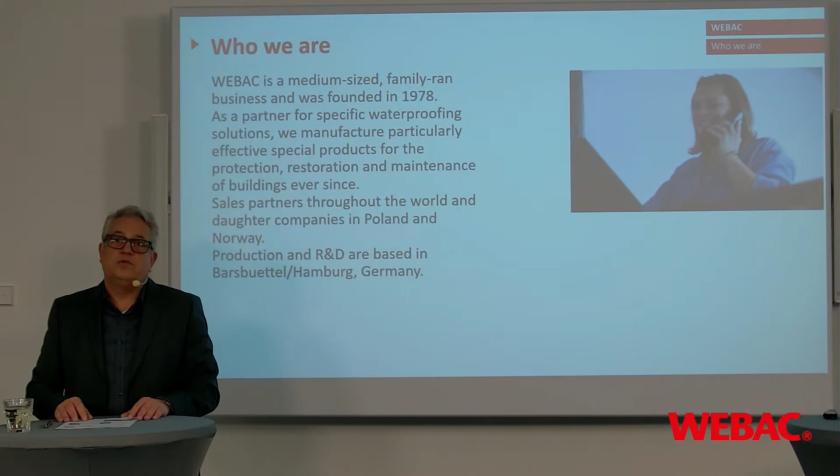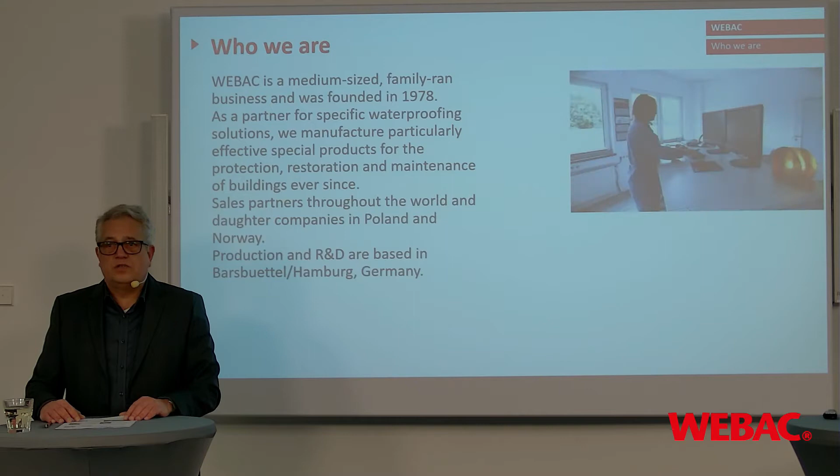So, you already have seen our company presentation. I would like to spend a few words to tell you who we are. WEBAC is a family-owned business. It was founded in 1978 as a producer and developer of construction chemicals for the maintenance and restoration of buildings. We are here in Hamburg with our production and our research and development center. This is centralized here in Hamburg.

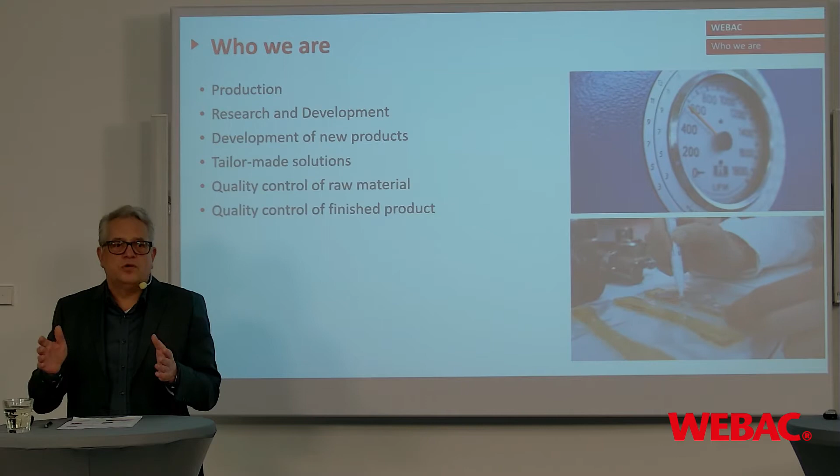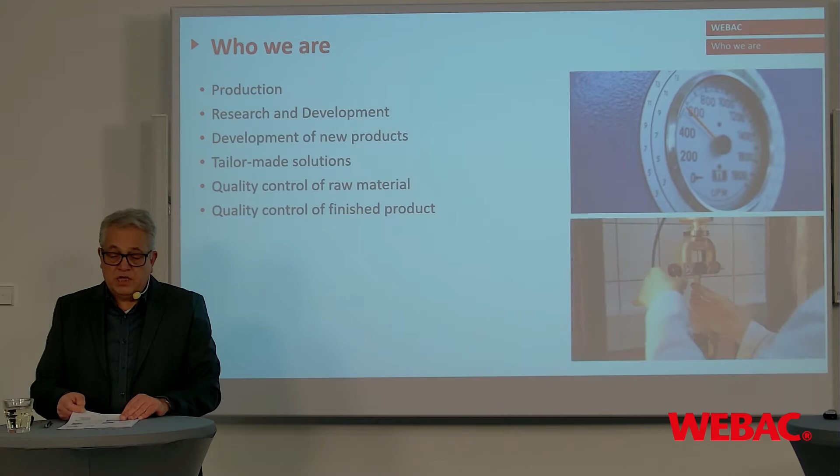This is in regards to quality control, because, and this is one of our strongest points, in the world you find different climate zones, and these construction chemicals react to temperature changes, and it's very important to know which product suits the climate best. Therefore we have short ways into the lab, so we are able to adapt the properties quite fast.

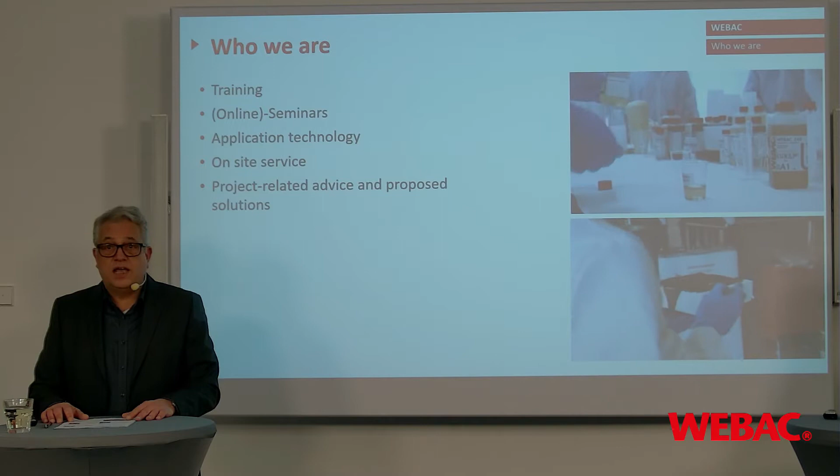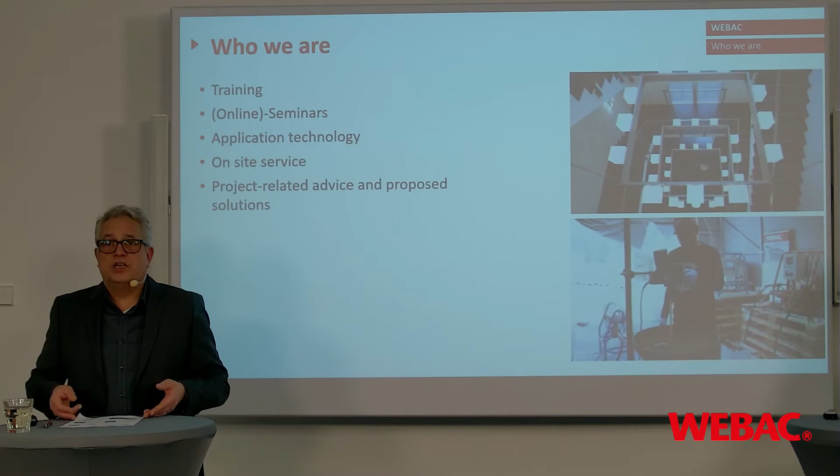We are normally standing here in our seminar room. Like Stefan mentioned before, here we do our trainings. We do trainings for designers, where we focus on the lifetime of the building, but also for applicators, where we focus more on hands-on seminars, how to drill, and exchanging experience. And last but not least, for site managers: how can I control the injection works? Our last seminar today is the Consolidation Line, and I would like to hand over to you, Stefan.

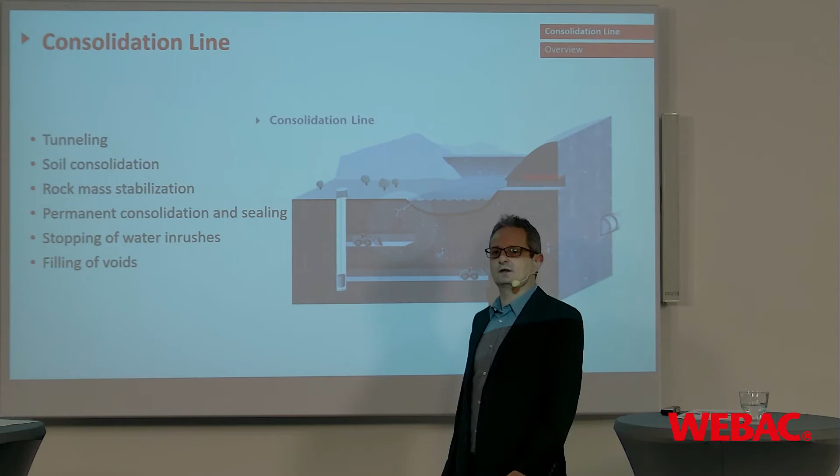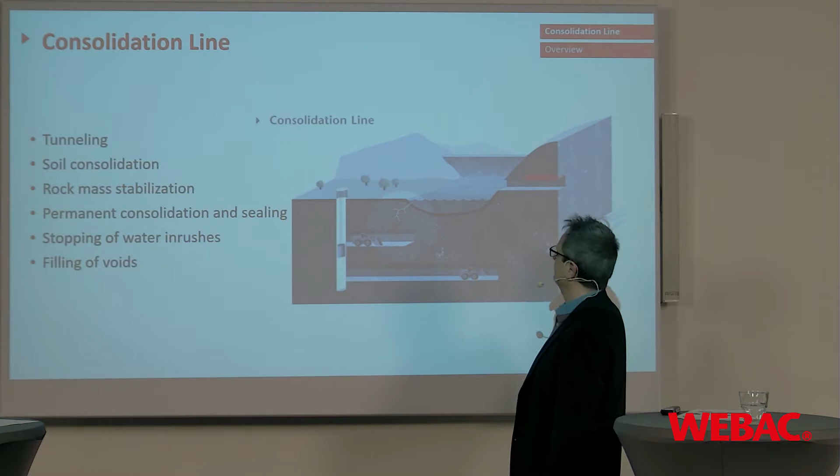Thank you, Markus. Our last seminar today is the Consolidation Line, which means a different application range to standard injection works. Let's switch to that slide. You see we have a whole wide range of these products. It goes from stopping water inrush, and we will see some interesting pictures of that later in small videos, to rock mass stabilization, which is part of bigger things. Permanent consolidation and sealing also includes slab lifting, which has become much more common worldwide in the last year, because the drying out of the grounds causes many problems.

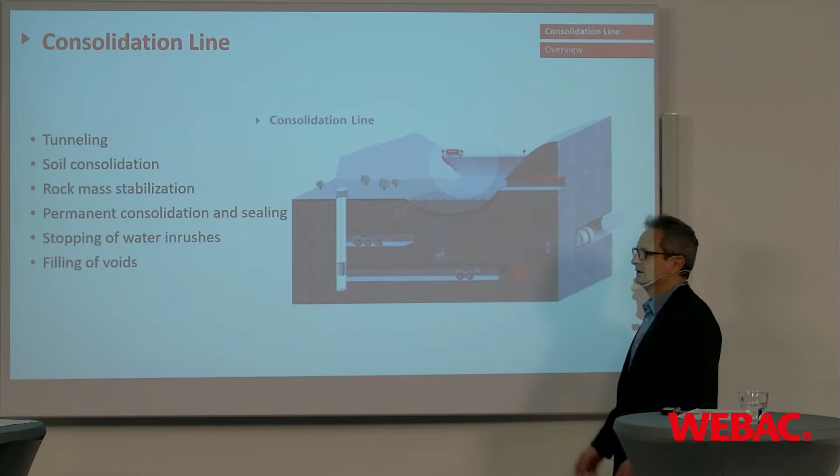As you can see, we have a tunnel boring machine here and a mining area here. It's not only for bigger construction sites; as you will see later, you can scale it down to your small sites, which may be interesting for you to think about these kinds of application ranges.

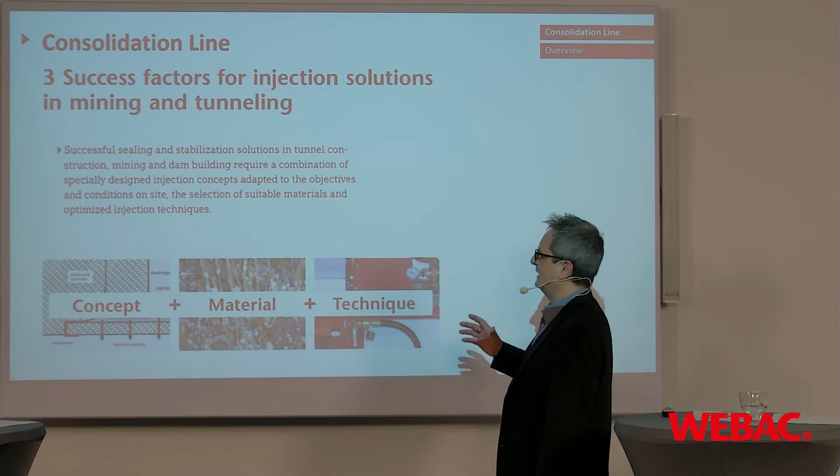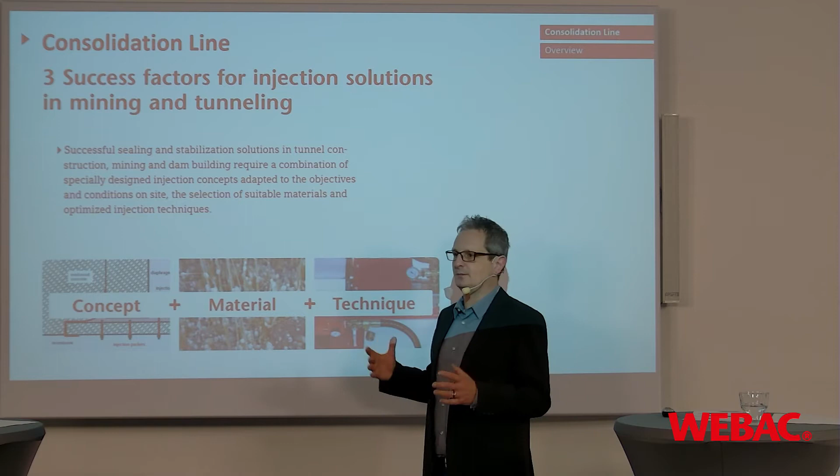The most important thing, whatever products and technique you use, is that it has to be done with three key points to fulfill the right working concept. You have to make a concept: it's necessary to know what targets have to be fulfilled and what the conditions on site are, and this concept has to be adapted to the situation on site, in mines or underground construction sites. It's also key that you don't have only one concept; you should have a second or third one. As we are injecting into an unknown area, you never know what happens, so it's good to have a plan B.

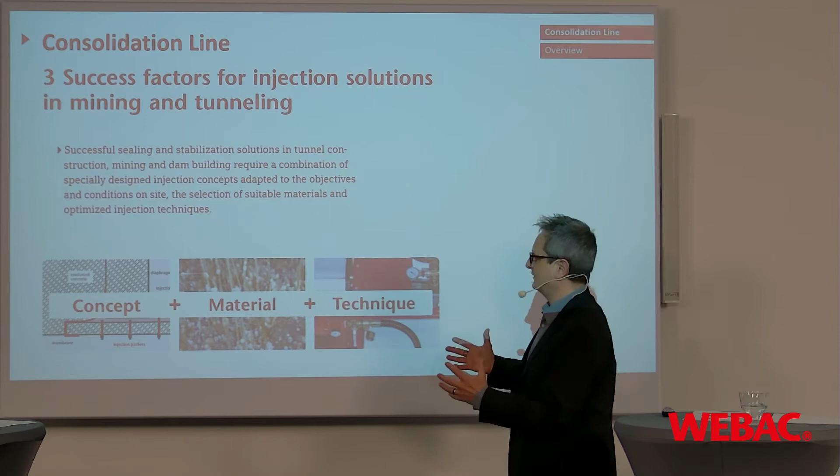Material is the second point. Once you have your concept, you can choose the right materials, because different materials are available depending on the situation. And finally, the technique, which is also important, to bring the material into the construction or the soil: packers, techniques, water on site, air supply on site. These three key points have to be prepared before you start working.

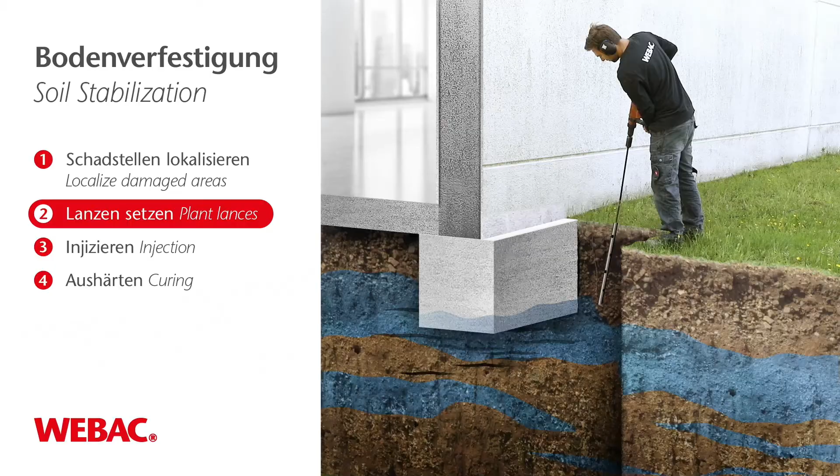Finally, we will show you a small video about how this is working. In this case, it is a smaller building site, and it is about ground stabilization. You see the foundation. The concept is done beforehand, so the target is void filling in underground situations, and therefore we drive some lances into the ground to the depth that we need, which is necessary to know before you do that.

In the next step, you see my colleague there hammering the lances. You can couple lengths of the lances. Then you connect the connector to your pump. Safety is also important on site. You make sure that everything fits and everything is done, and then you start your injection to fill the voids under that construction area.

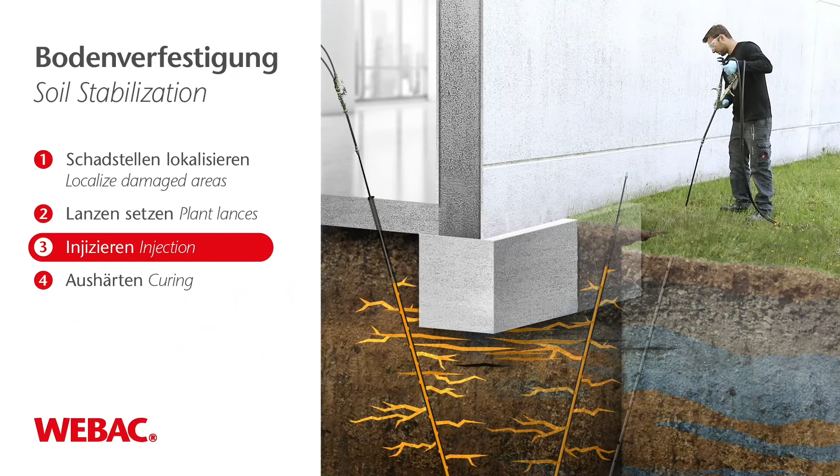This is also important: you do a secondary injection to spread the material in the depths, and after that you can unscrew and recouple everything to check if your work was successful. You see all cavities will be filled in that part. So this is the main process that you see there.

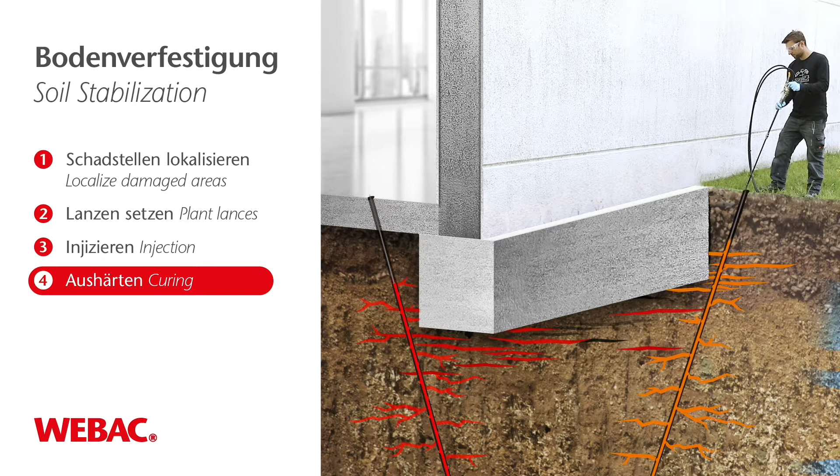So what you saw in the presentation, after the work the foundation is stable again, and here we see how it works in practice. We see it in the pictures, and you saw it in a short video.

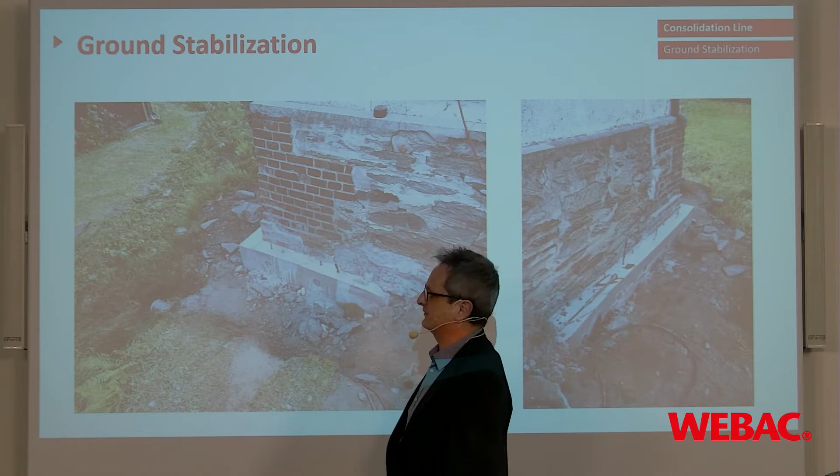So we have the same situation here. We have a settlement of the soil because there's water washing out the soil conditions. So they brought a concrete barrier to make sure we can adjust the lances with a safe grip inside the structure. The lances are placed inside the concrete to stay stable, and you use the injection pressure required for the soil conditions down there. The target, as seen in the video, was to settle and fill the voids under the foundation pit, to make sure there's no collapsing or washing out again.

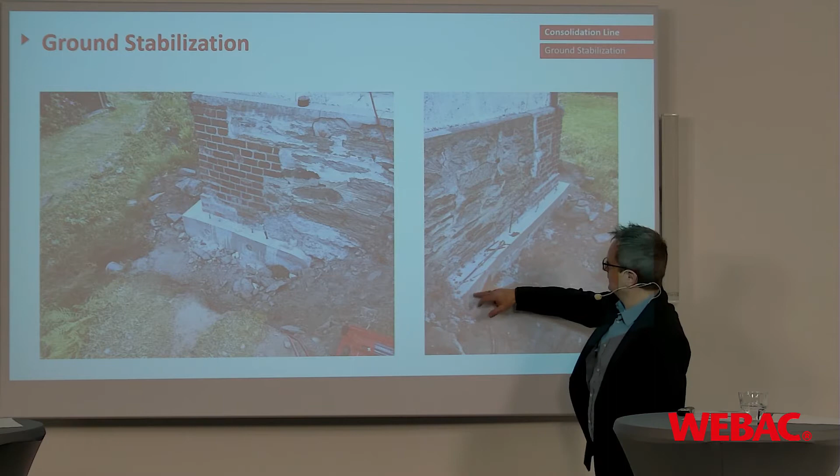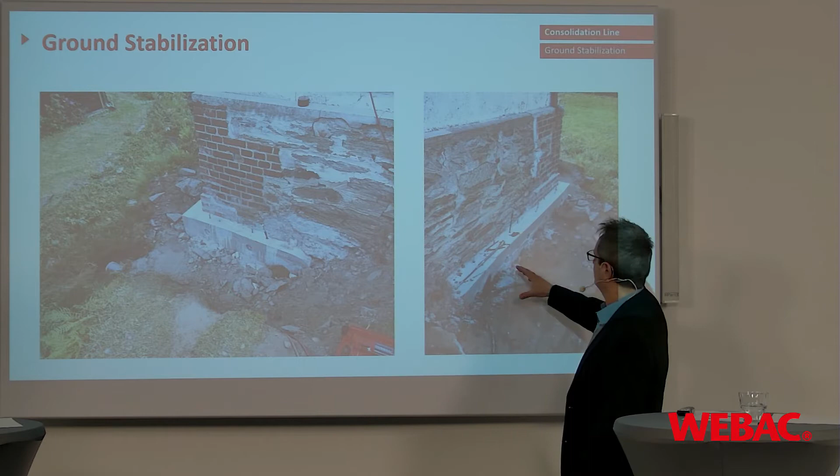In some spots, like this one, it's necessary to get information about the ground conditions. Otherwise, you are not able to place the lances to the depth you need - maybe there are stones or rock under that point, and you're not able to fulfill the cavities or complete the work down there.

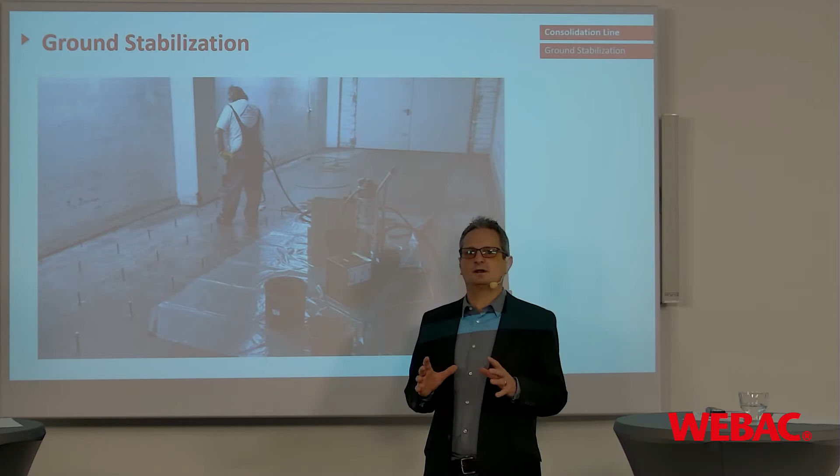Coming back to what I mentioned before, this consolidation line can also be used for smaller spots, which is much more common at the moment, like slab lifting - we get a lot of job sites there. You see the pump is not the big one, it's a smaller pump, handled so you can use it in closer areas.

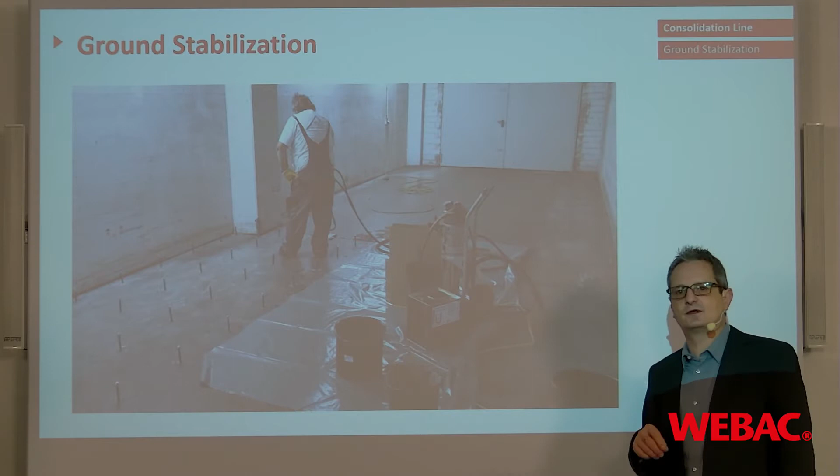Here on this side, the slab got a little collapsed. We had a difference between that slab and that slab point, so to prevent loose ground underneath, we installed some packers, and the injection was done under that slab to make sure there's no collapsing, and we can lift it a bit upwards to the point we need.

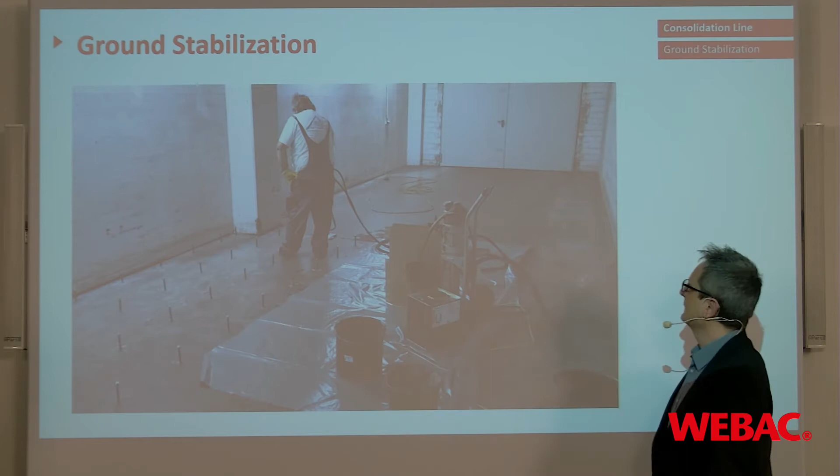Now I get it - I think there was traffic from forklifters. Yes, and with the load of the forklifter you got different settlements here in the joints, and then parts spalling of edges from the concrete. Yes, so we'll slide that down.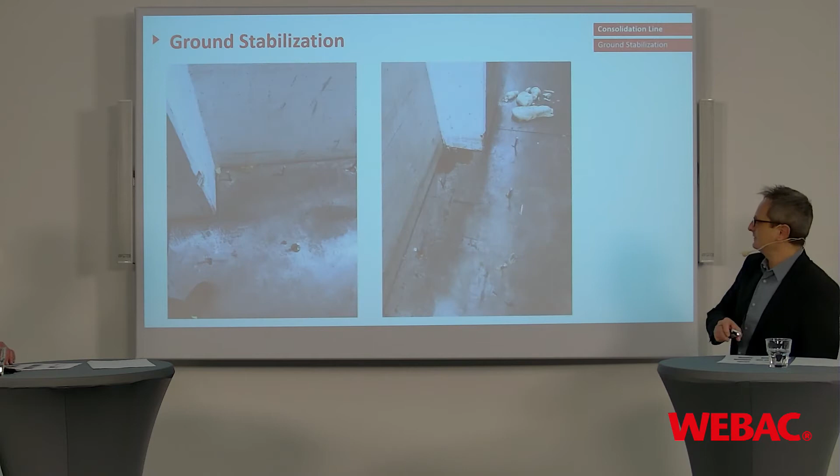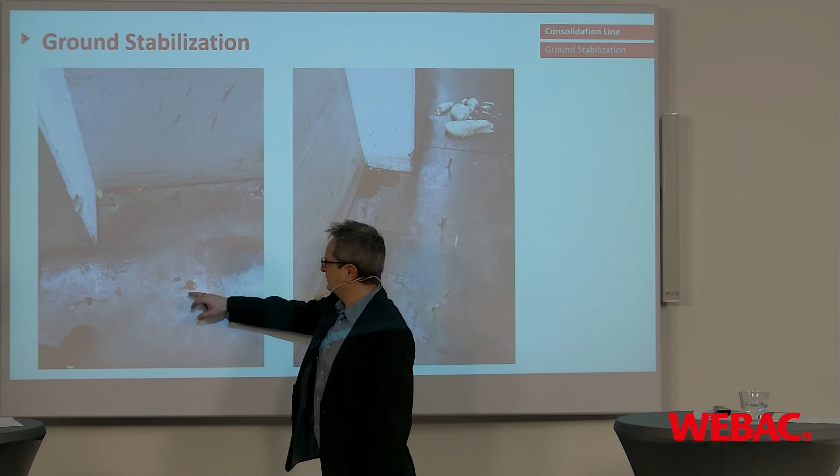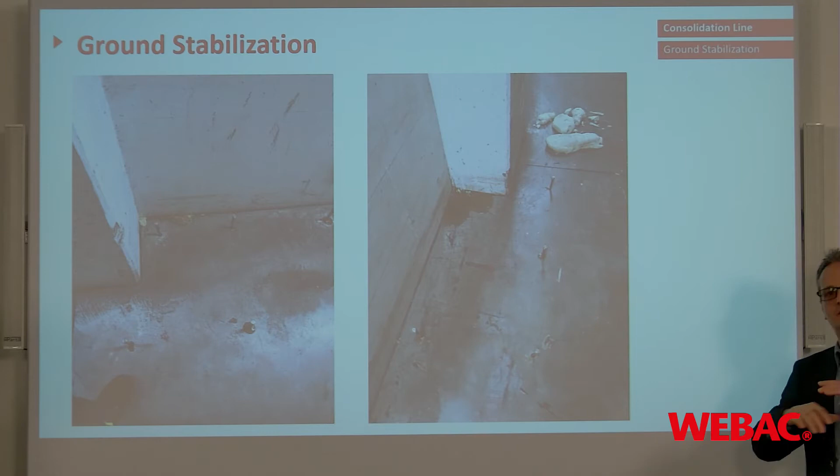You see it in some more detail. We have some ventilation in the area outside, which is necessary to release the pressure of the material created in the soil. You also have visual observation - when you start injecting at this point, you see the material growing under the slab to make sure we fill all the areas out there. Another point is we have some foam coming out of that joint, and also a little outflow here, which guarantees that your level or gap is filled under that point.

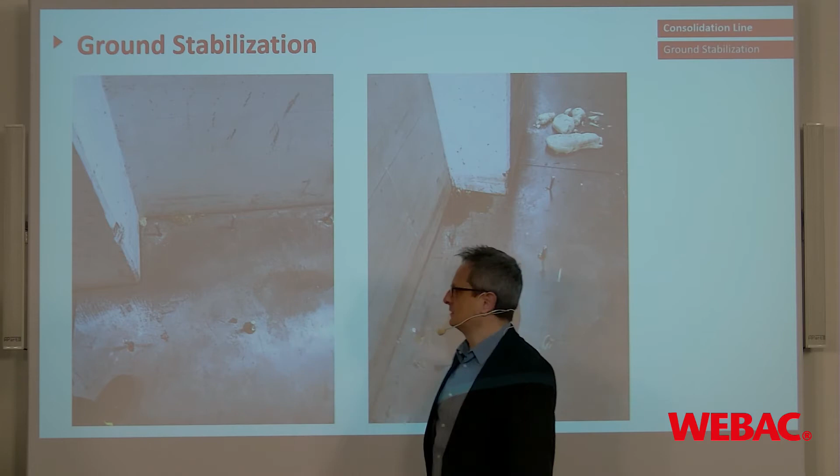Another important point: make sure you're not too close from packer to packer, because you need a little distance - if I inject on one packer, the other packer should still be open and not sealed or cured closed by the material.

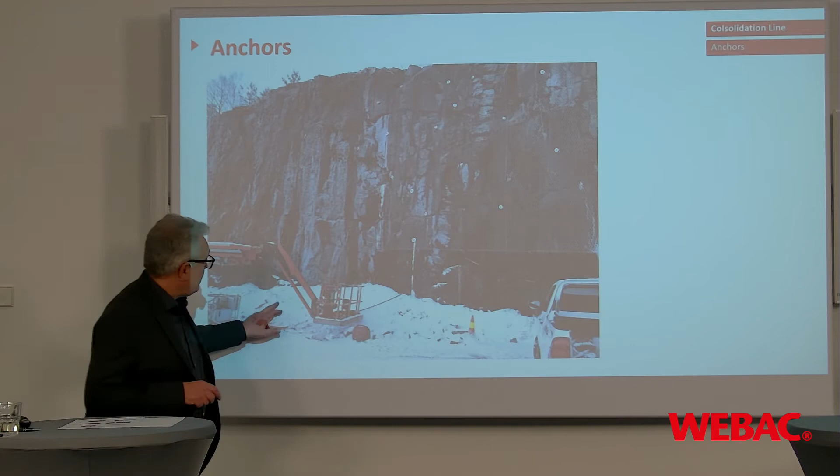Another application area could be the gluing of anchors. In this case, you see the bright spots - this is simply a wire mesh to protect against rock fall. And here you see it was in a colder climate, it was snowing.

It was, I would say - Stefan, was you with me there? No, I think it was Maurice.

Something around minus 5. There, the target was - normally you inject these anchors with cement slurry, but due to the cold temperatures the curing process took too long, and they needed to protect the road. So the choice was a compact silicate. We made a pull-out test afterwards, and the result was that after 1 day we fulfilled, or more than doubled, the values we needed.

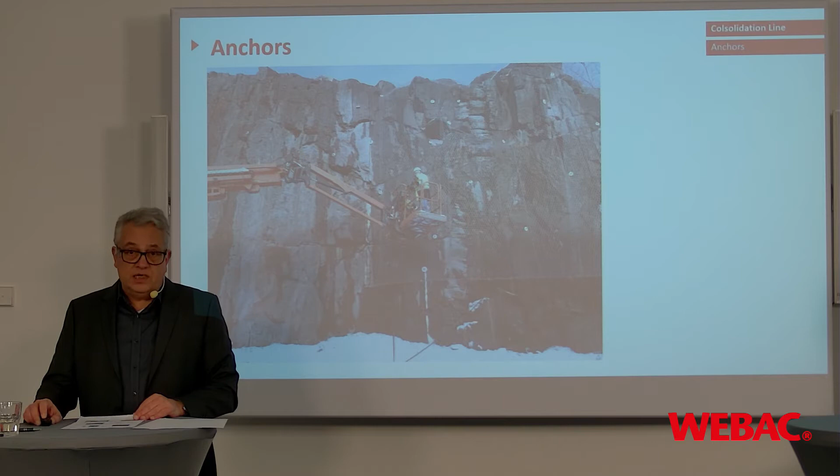So this is the application of anchors.

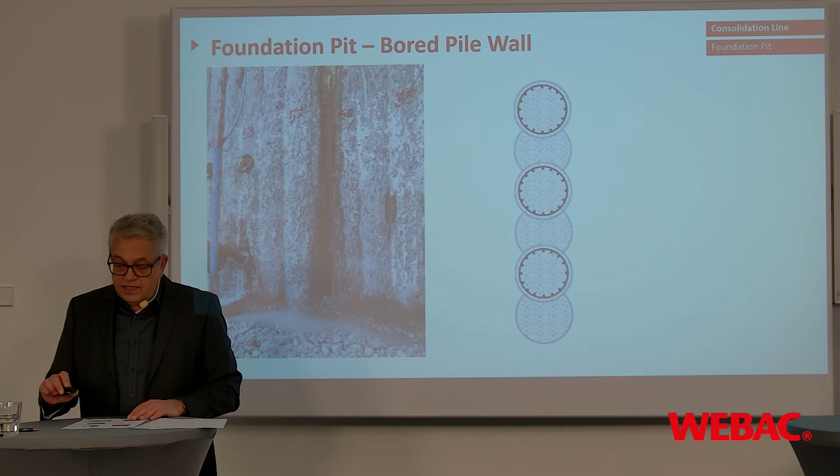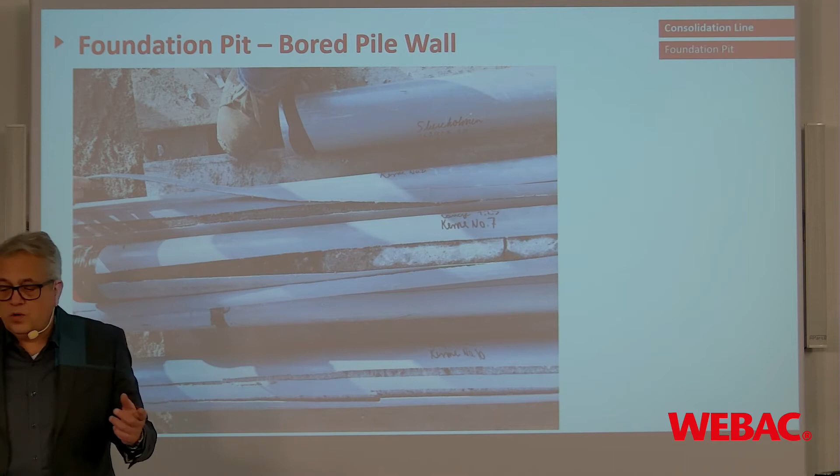Foundation pits very often get made by secant pile walls or bored pile walls. This is a building site in Denmark, and the problem was simply that - I'll go one slide back - they took out drill cores. Here's a drill core, and you can see concrete here, and here was an area where you only find gravel. They made these drillings and saw that at a depth of roughly 5 meters we have these problems, and at a depth of 8 meters we have areas where we don't have proper concrete, only gravel. The complete bored pile wall or secant pile wall was 30 meters in length.

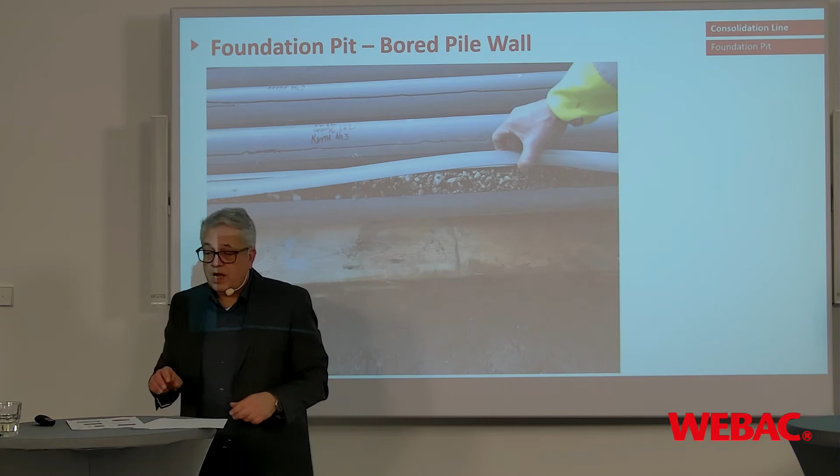So the target was to stabilize all of this so the bored pile wall can take the loads. Here you see it a little bit better - areas where the cement was washed away. Sorry, I have to go back to this slide.

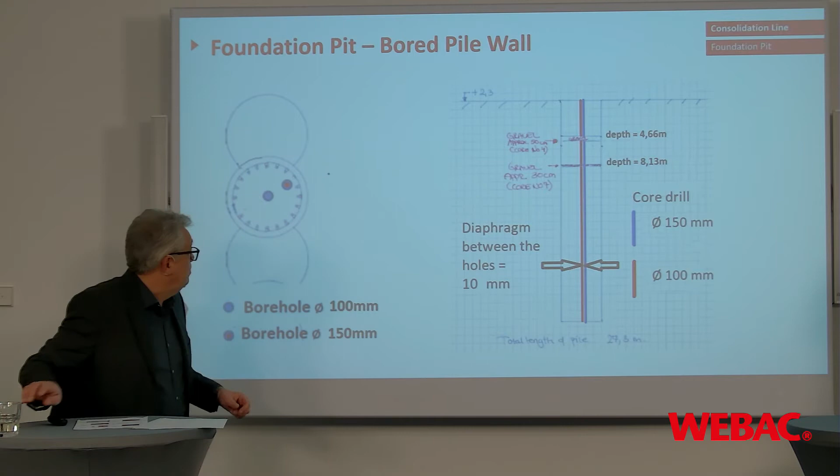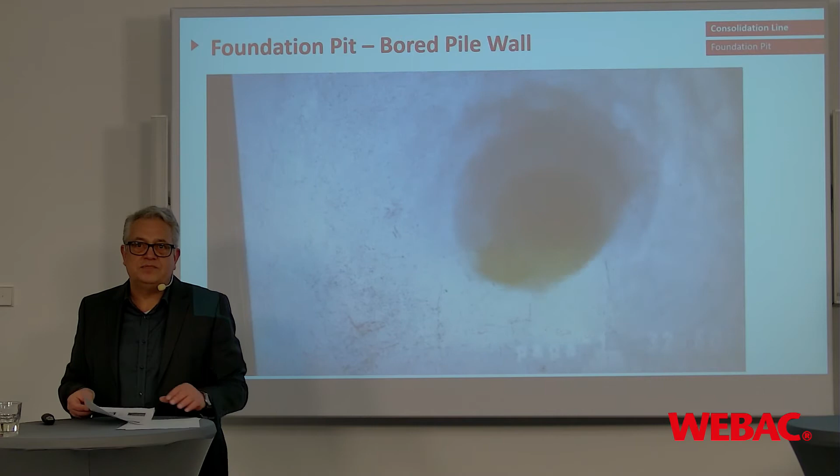The information we received was that they had made 2 core drillings, and they told us there's a wall in between these 2 drills, with a distance in between. But you know how it is - the situation is often different. So we went in with a camera, and there you see suddenly the drill holes were connected. You see it here - this is the way to the other core.

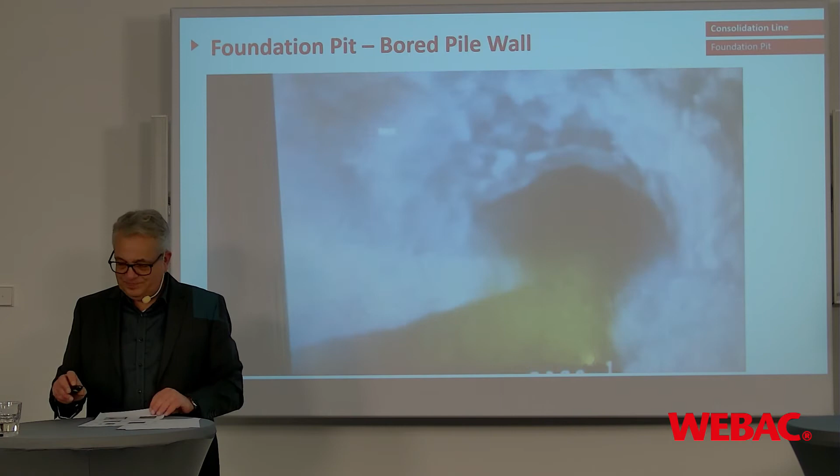So, Markus, meaning our concept, what we thought, totally failed - that's what we spoke about. Right, so that's the reason why, as you mentioned earlier, it is absolutely necessary to have a plan B and even better a plan C.

Maybe you joined the crack repair session, the live seminar yesterday. For those who have seen this, it was a diameter of 150, so we had to use packers of this size. Everything was bigger and heavier - you have to take care that the packer doesn't fall down 30 meters.

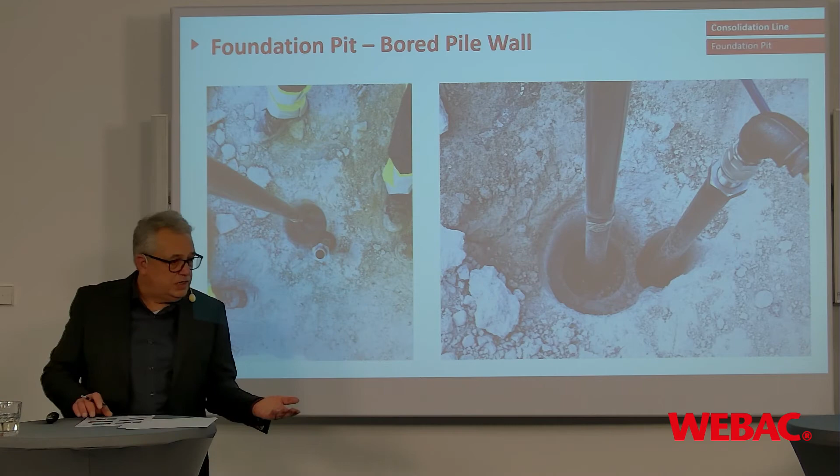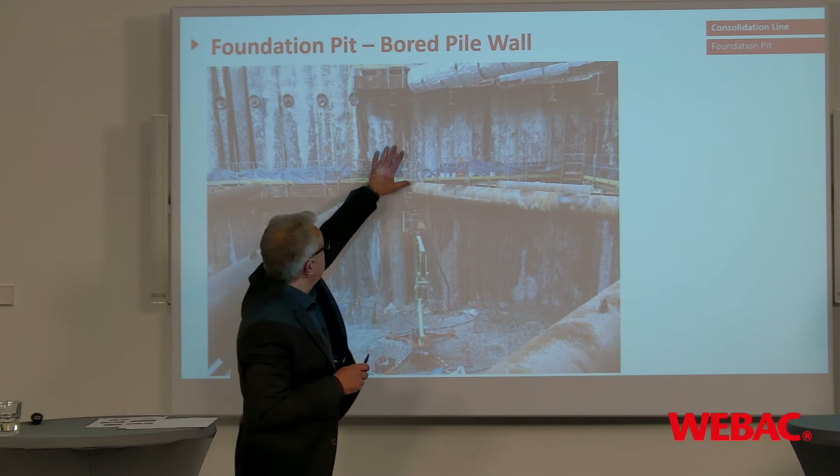The only thing to do then was this: one was a feeding packer and this was a ventilation packer. We installed feeding tubes 30 meters into the depths to fill from bottom to top, and also let the air out. This picture is taken afterwards, so the quality isn't great, but it was in this area - there you see some material coming out, and here the gravel was glued together, with the target that the secant pile wall can take the loads again.

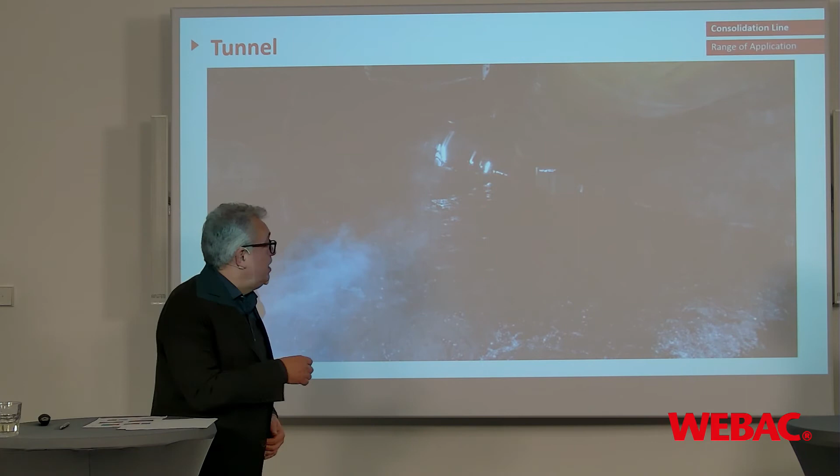Stefan? Yeah, here we now see a picture - hope you can see it quite well. We have a tunnel which is totally flooded. The water level will be, let's say, half the height in the tunnel. And here we are coming to a point - this could also be dangerous, so we have to prevent this.

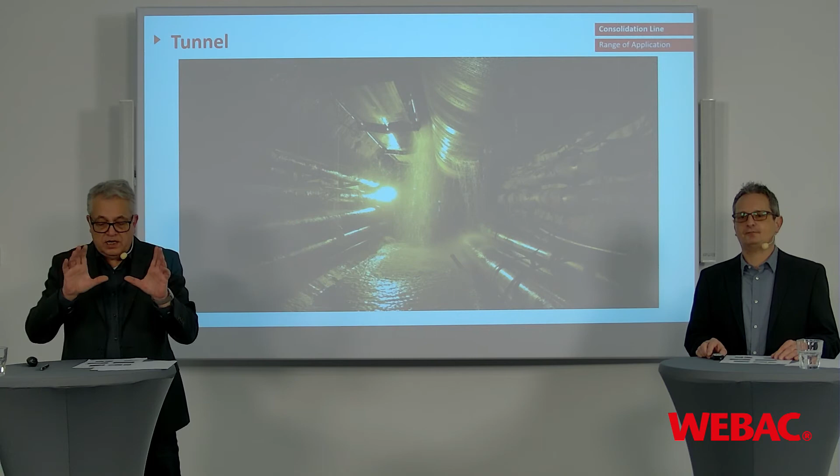We were called to this building site, and it took them over a year to rebuild the TBM. Afterwards it was looking like this because they had such a volume and so much water streaming along the overcut in direction of the tunnel that they had a lot of water ingress. Normal cement grouting was no longer possible because the cement got washed away immediately.

Stefan, what do you think? It was 20, 30, 50 liters per second, roughly like this. The main key point was that you never know where the water is flowing or coming from. So this includes, let's say, some drills to inject colors to make sure you know the direction of the water, which makes it much easier to install the packers and inject these areas. For example, there we decided to move about 10 or 15 meters behind that gap and inject it there, because we know the water flow and the water pushes the material to the gap which has to be closed, and after a couple of injection hours we got the job done.

So in this case, we went in the direction against the water - that's right. We injected some color and measured the time between the packer, from the inflow to the outflow. So once you've measured the time, you're able to adapt, like we did in this case, the speed of reaction to the situation on site, as needed.

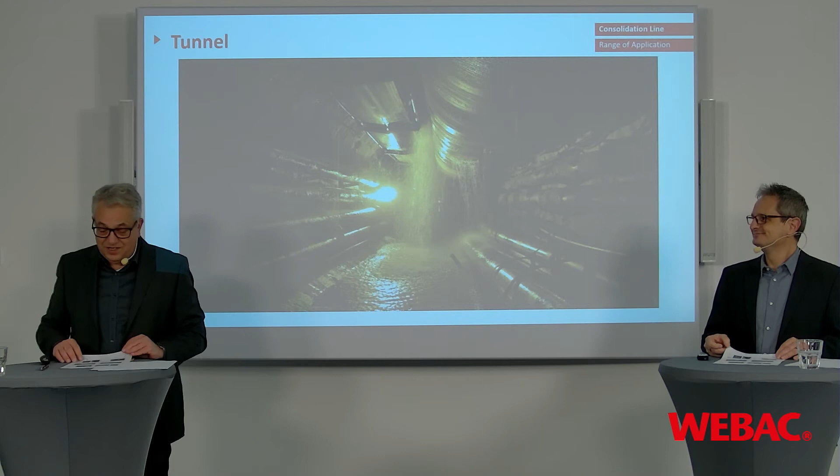For sure, yes. And the funny case was, we only had a few seconds - you'll see it in a video afterwards. So on this site I had a nickname: the pump destroyer. The pump destroyer. Yeah, okay.

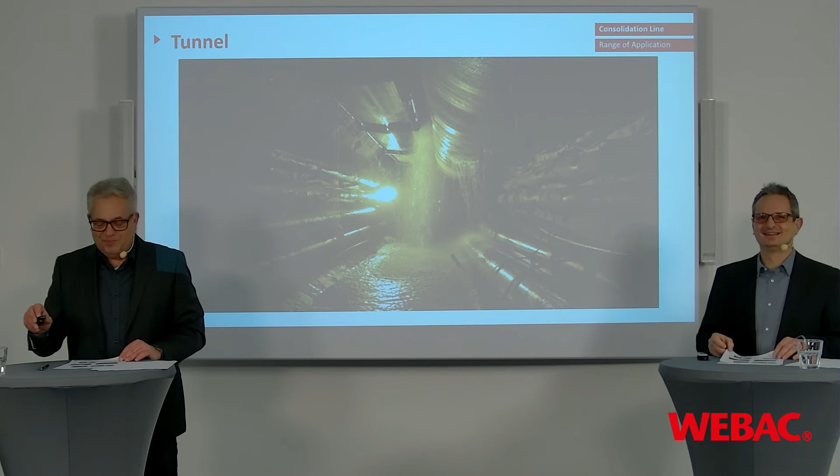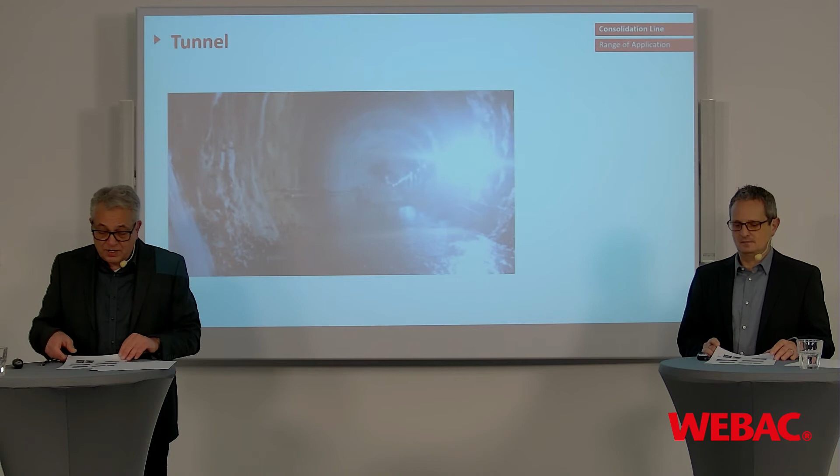We are, let's say, building in unknown ground, so expect the unexpectable. After you have done the job, you are always more experienced. But in this case, in this geology, to make a drill and blast tunnel, I think they didn't know that this geology formation existed. Otherwise, they would have made a segmental lining.

This is the picture before and after, or let's say during the injection works. You can compare it a little bit with a normal crack injection, but everything is bigger, everything is taller. So you are drilling into the rock, trying to find the crack. Then you inject maybe some color, measure the time, adjust the speed of the material, and then you can do a proper job.

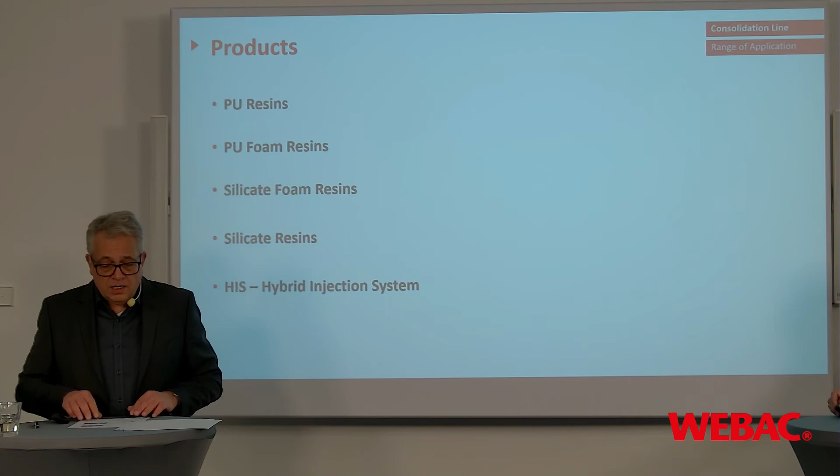From the product side, there are different types of products, like from other injection works. There are polyurethane foam resins where you can create a fast block first to stop the water or stop the main water inrush. Then we have polyurethane resins with less foaming, which is more common if you do slab lifting. Also, a special thing to consider is if you work in front of a cutter head of a TBM and inject a huge amount of polyurethane material, sometimes it can be critical about the gluing factor. The material will get warm during cutting, and the TBM can get stuck.

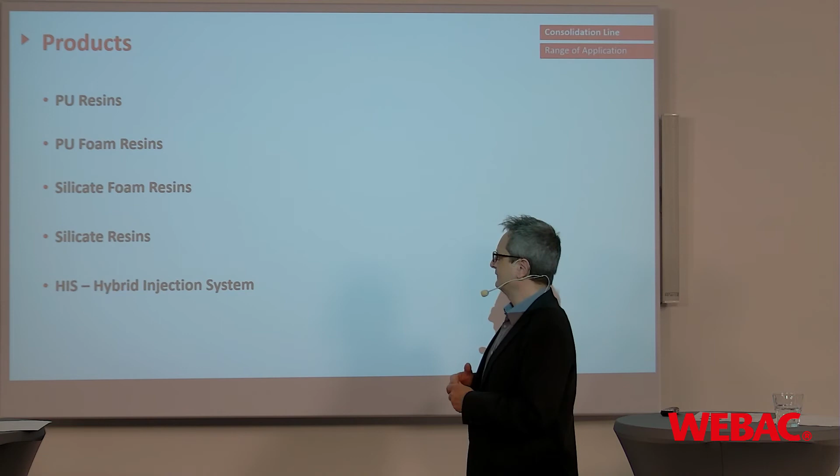So therefore, there are some silicate systems available, like silicate foam resins and silicate standard resins, which can also be used for anchoring, for example. But these products are cuttable, meaning if you inject them in front of a cutter head, you can go through after that injection much more easily, without any problems. Finally, to make it more economical, there are new hybrid injection systems which combine cement grouting with polyurethane grouting.

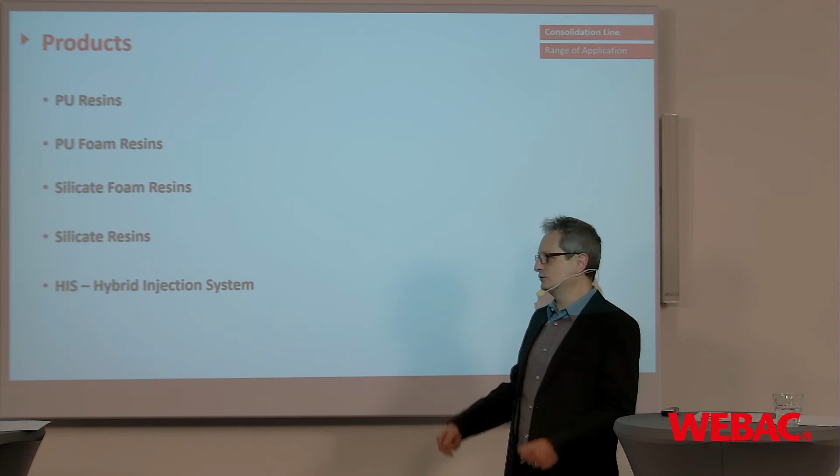This is a short overview. And as you remember, these influences of the material range also have a huge influence on the concept you have to develop before you start your injection works.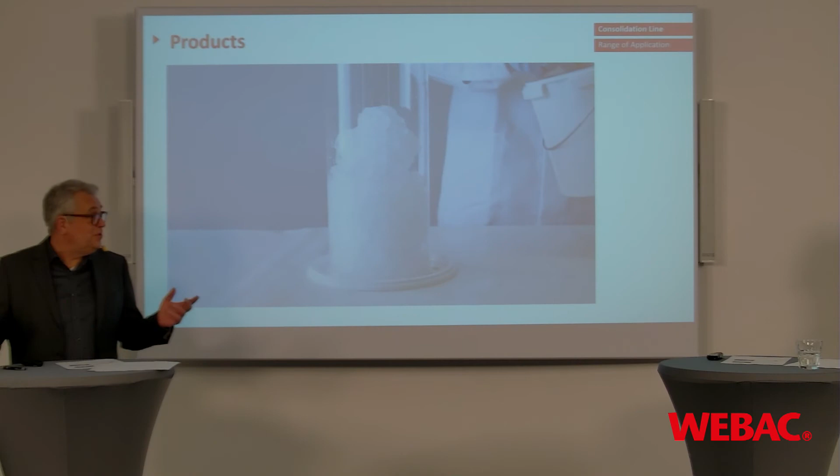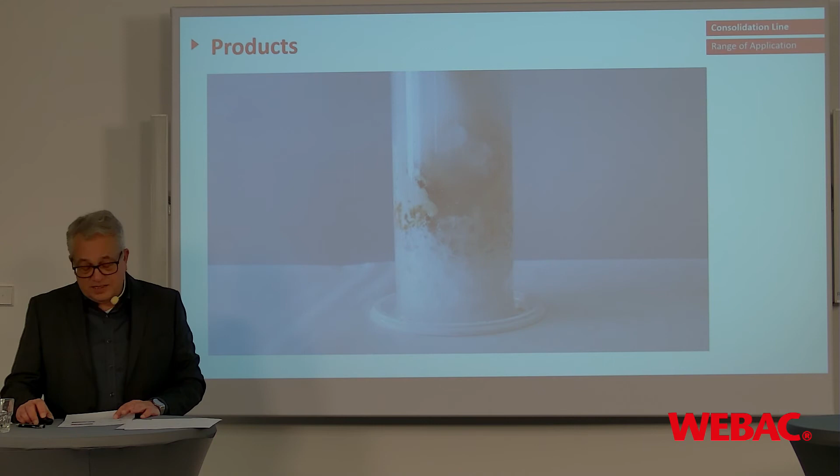Okay, super, so this is my favorite product. Like I told you, we are able to adapt the speed of the product and show you how fast they can be. You see it there, it's only maybe 3-4 seconds. With this material, you can stop a waterfall. And the pumps, for example - yes, thank you for reminding me, you can call me pump destroyer.

That you don't destroy the pump - Stefan can tell you something about how to clean it, how all this works. Yes, you heard the products have, let's say, a short reaction time.

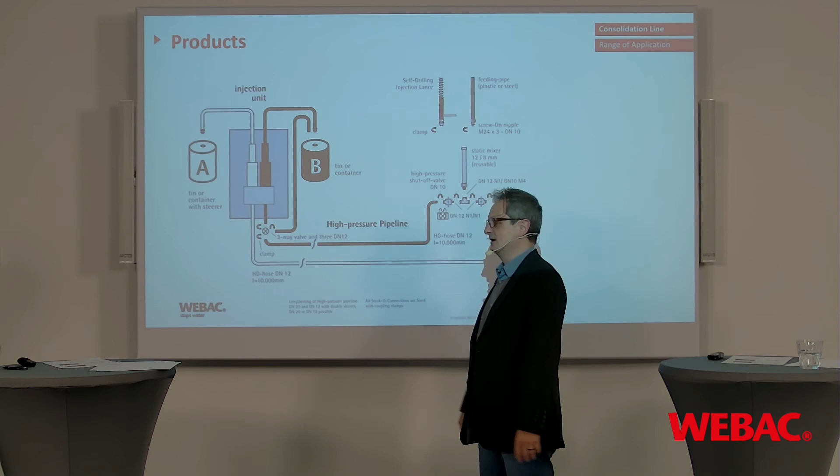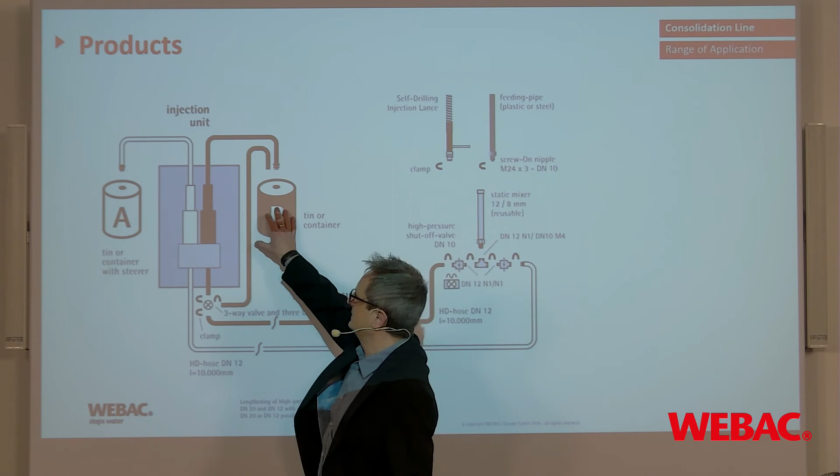Therefore, it's necessary to use another injection technique, injection pumps. It's a two-component pump system, which means you have component A and B in a container, connected with a suction hose to your pump system. All the lines go to a special mixing head, where all the components come together. A and B will be filled together in that area. Due to the fact that we have a short or fast reaction time, we need to flush the system during the injection.

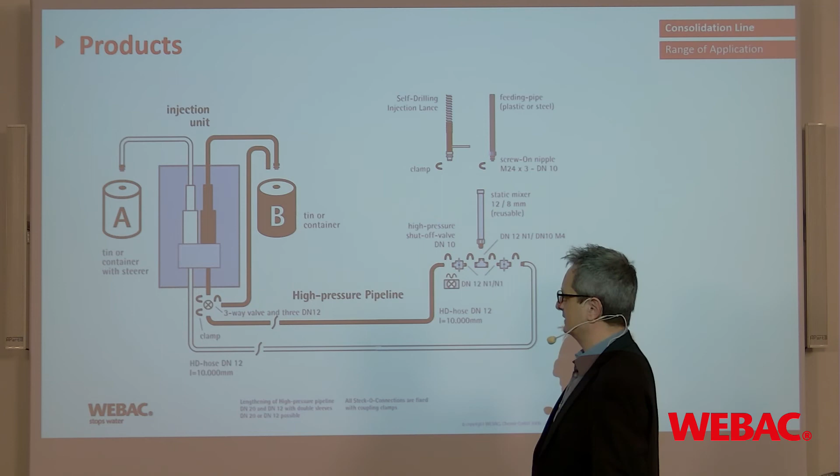This will be done with a three-way valve, so I can switch to inject A and B together, or clean the whole system with a small amount of A component to make sure the connections, the mixing elements, the mixing pipes, and maybe also your packer or inflatable packer will be open for a secondary injection - for example, if we have to go deeper or continue with our injection work. This also gives you time to switch from one injection point to the other.

And sometimes on sites, you prepare your injection material, meaning you have a standard version and an accelerated version, so you can play with the material depending on your situation on site.

Finally, one last thing - we also have different mixing pipes, depending on the material type you are using during your injection work.

Okay, oh, oops, sorry, too fast. So that was my turn, Stefan. Sorry for that.

So yeah, I would say we covered the product and the application range a little bit. If you have further questions, because there is a bit more planning work necessary, we have to take into consideration surroundings, all these things.